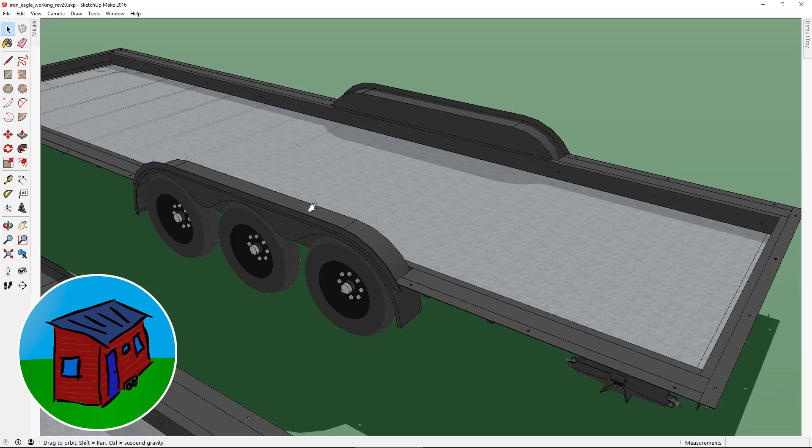Hey guys, this is a demonstration video on how to make best use of the Iron Eagle tiny house trailers that we've produced using SketchUp. We worked directly with Iron Eagle to make sure that everything is bang on accurate, and we've bundled all 9 of their trailer lengths, ranging from 12 to 28 feet, into a single download

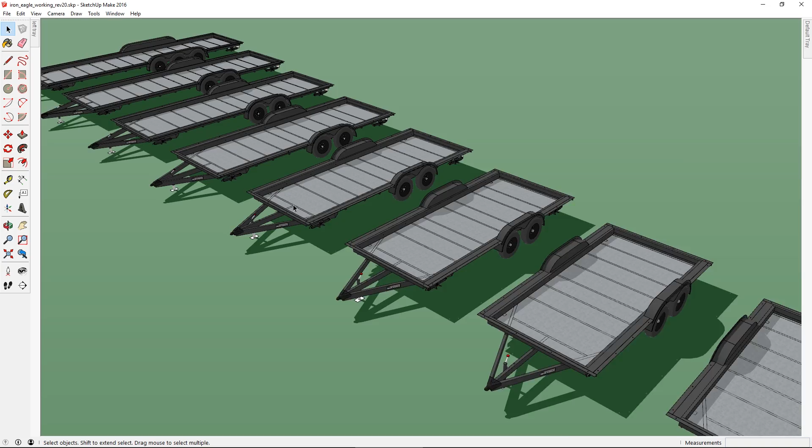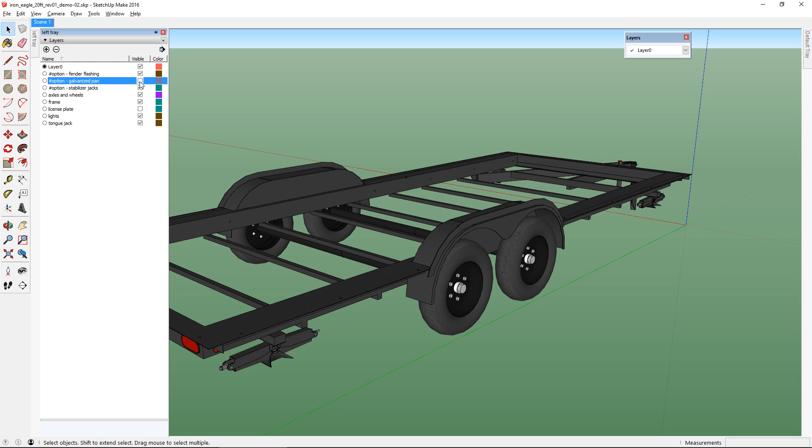So without further ado, let's look at how the sunken floor and flange system is meant to accept a tiny house foundation. First, let's do a quick tour of the model. I'll point out that I've got things organized into layers, which should be pretty obvious the way that they're labeled, including these options. So the options are fender flashing, the galvanized pan, and the stabilizer jacks.

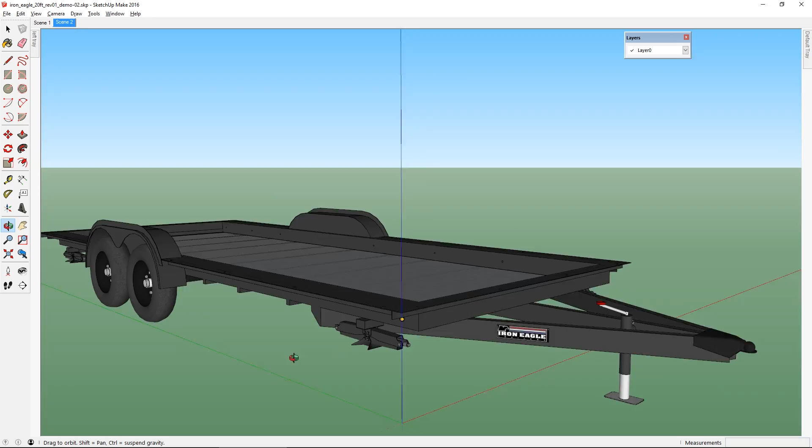Then you can also hide the axles and wheels, the entire frame. There's also a license plate just to demonstrate where it will go. You can hide all the lights and the tongue jack. One of the big things about the Iron Eagle design is the sunken floor cavity, which means there'll be no metal directly underneath the tiny house floor.

We've already made real-life videos going over all the features of the design in detail, as well as a demonstration of the construction of a floor inside an Iron Eagle trailer. So I won't go over all that again. I'll focus more on the actual 3D modeling here.

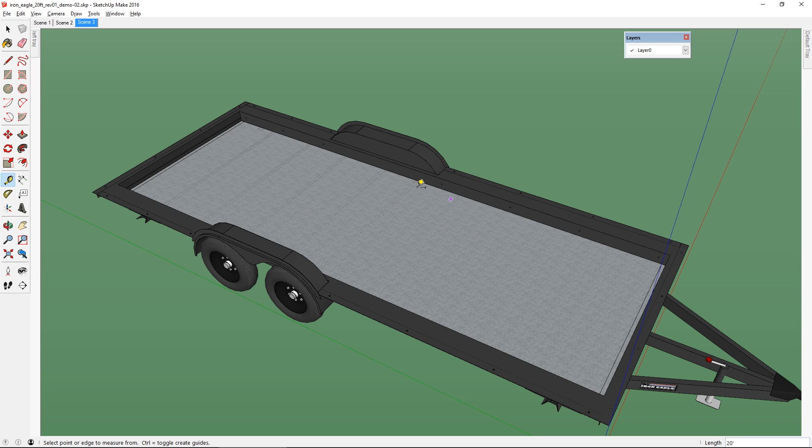So since this is a 20-foot trailer, and that measurement is from the edges of the flanges, we can do a 12-foot piece of lumber, and then what will be slightly less than 8 feet, because we're working inside the floor cavity, to do our rim joists. So I'll start down here and make my first piece of lumber.

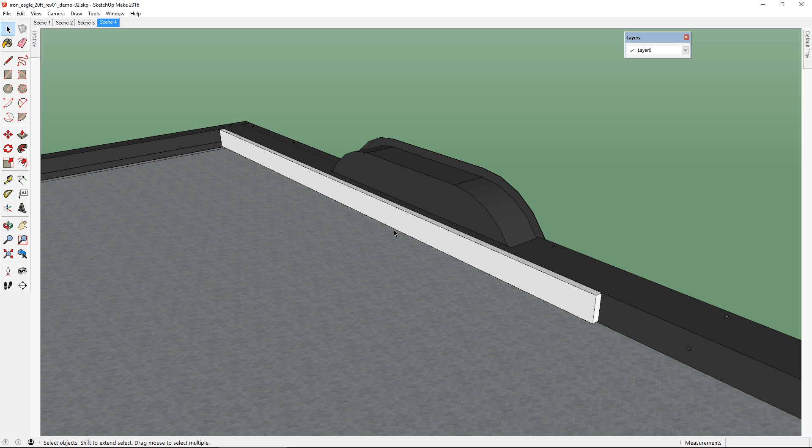So I'm going to use the rectangle tool, start drawing here, and let's go 1.5, comma 5.5, and then I'll use the push-pull, pull that out, and let's make that 12 feet. So this will be a 2x6, 12 foot long. I'm going to make that into a group, and I'm also going to give it a wood texture. Let's use this one. There we go.

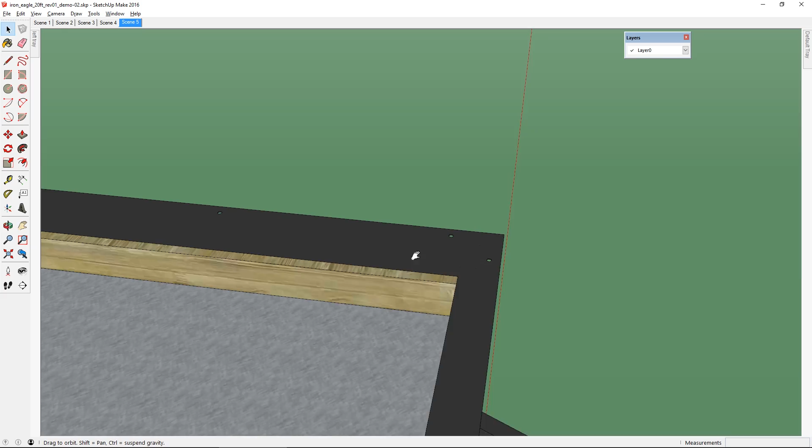Now I'll just select it and copy move it down to the end here to make a second piece, and then use the push-pull tool to snap this into here. Now you'll notice that the trailer framing has holes pre-punched in the side, and those are meant to accept hardware that will support those rim joists. So I'll just quickly make some bolts here so that we can visually see how that will work.

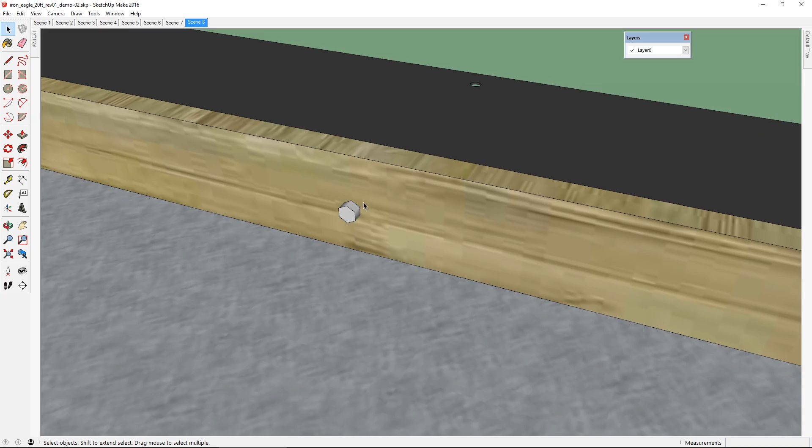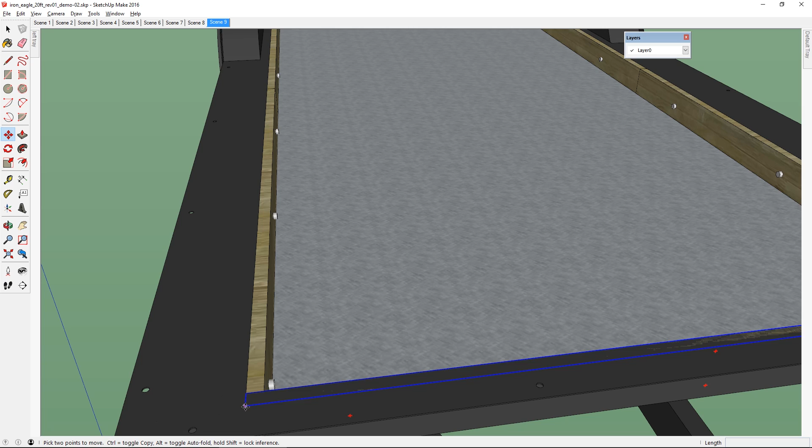Alright, obviously this is a very simple representation of that hardware. You probably want washers or maybe even use carriage bolts or something, but at least we can see where they are. And now we can just copy this over to the other side. Now we'll want the regular joist, so I'll just make a copy of one of these guys, swing it out, move it into place, and adjust the length.

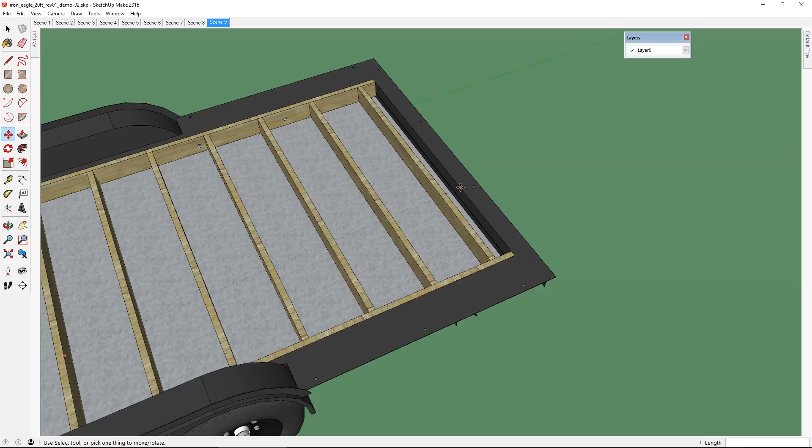And let's say we want 16 inch on center, so I'll move a copy out 16 inches times, let's go with 12, 13, 14, it's pretty close. So this way we can see if any of them interfere with the hardware, which I don't think they do, but that could be adjusted. So let's just get this last one. Let's make this last space a little bit bigger, something like that.

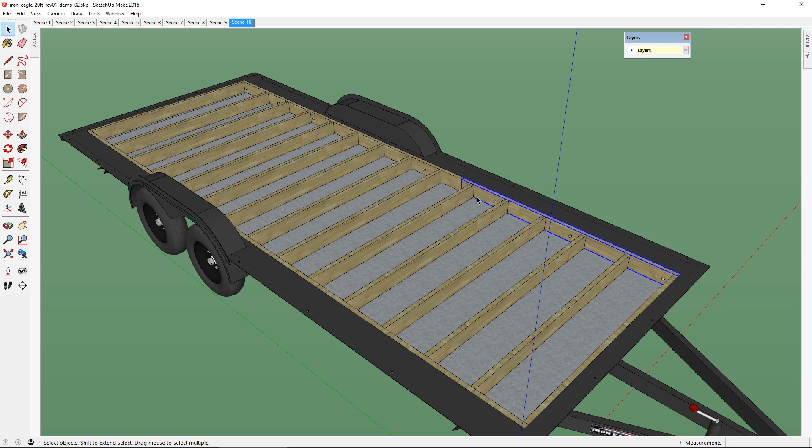So these joists would have to be supported by joist hangers connected to the rim joists. So let's see if we can just pop some in there. Go to the 3D Warehouse, I'll search 2x6 hanger, and pick this one. Let's bring this in, and I'll see if I can pop these in quickly.

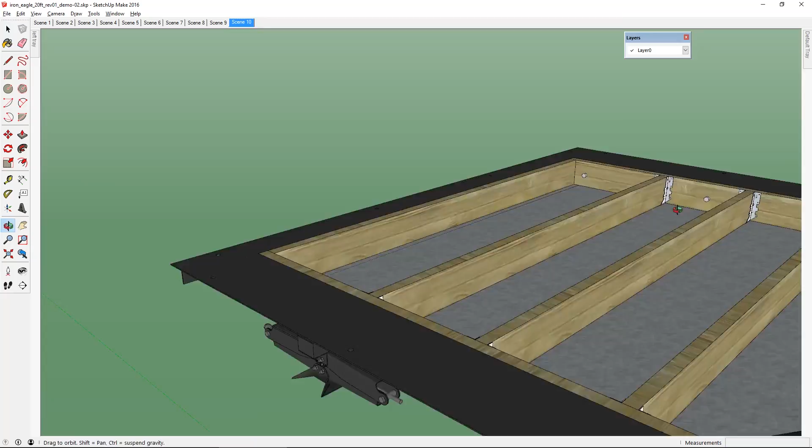So now we can see roughly how the hangers will sit, and we can see that this type of hanger would not fit on the end joists. So maybe a different type of hanger needs to be used. Or maybe we just need to move the joists out a bit so that this type of hanger can be made to fit. And maybe this will affect the order in which we assemble things.

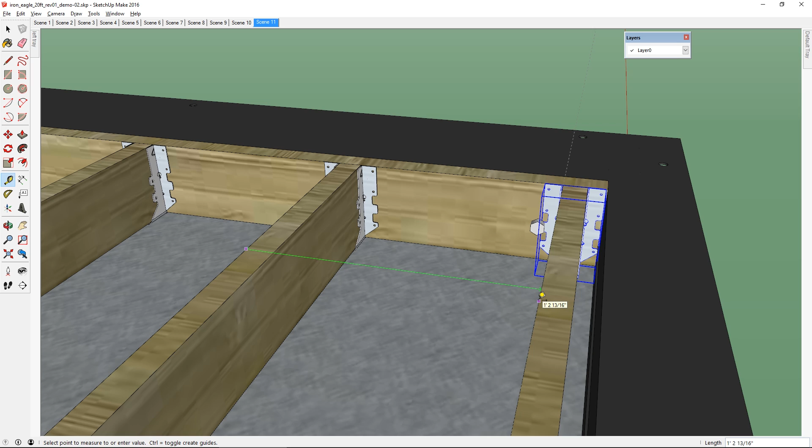And what about the space between these two joists now? It's no longer 16 on center, so maybe we need to bump all the joists down to account for that. Identifying and solving little issues like this is exactly what makes modeling in high precision great. Every little detail can be worked out before ever picking up a tool.

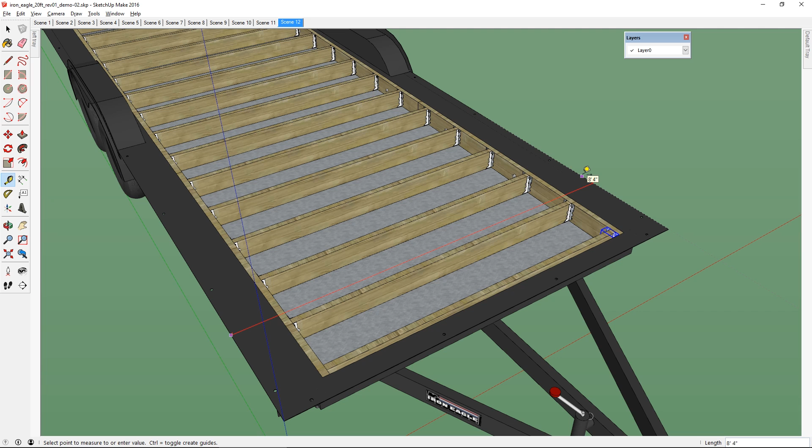Another thing that could affect the layout of the floor joists is the subfloor sheathing. Now, it would be nice to just put a bunch of full sheets down, 8 foot by 4 foot, but the 100-inch width of the trailer is 8 foot 4, so one sheet won't quite span all the way across. You'll notice if you watched our building series that we actually staggered some sheets, but a better way to do it is to put the bottom plate for the wall framing down first, and then put the sheathing in between. So let's do that.

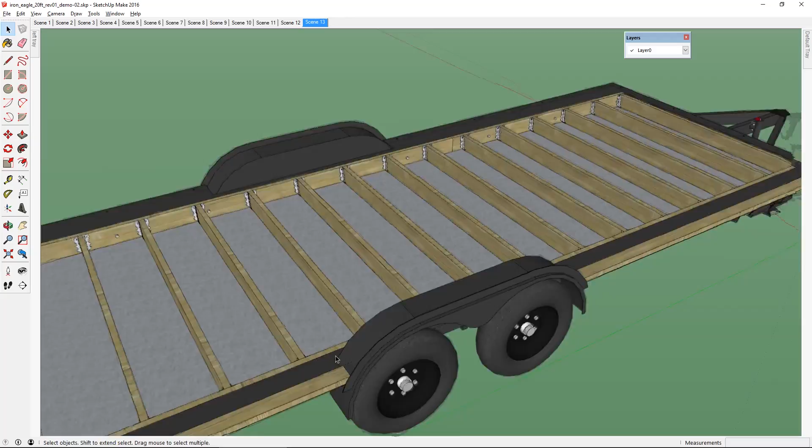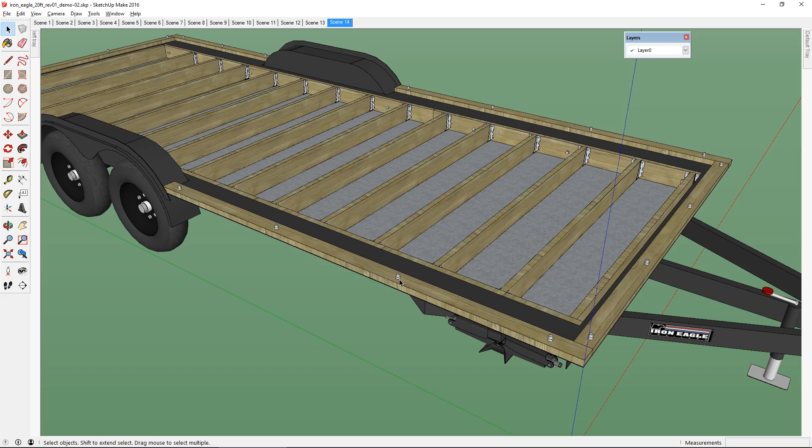Alright, there's a bottom plate in, and again I took the time to put in the bolts just for visual cue. But we actually used threaded rod and ran it all the way up and bolted it down on the top of the top plate. So there's definitely different methods that can be used, but it's just a way of highlighting the fact that there are also pre-drilled holes for whatever method you see fit to secure basically the wall framing to the trailer.

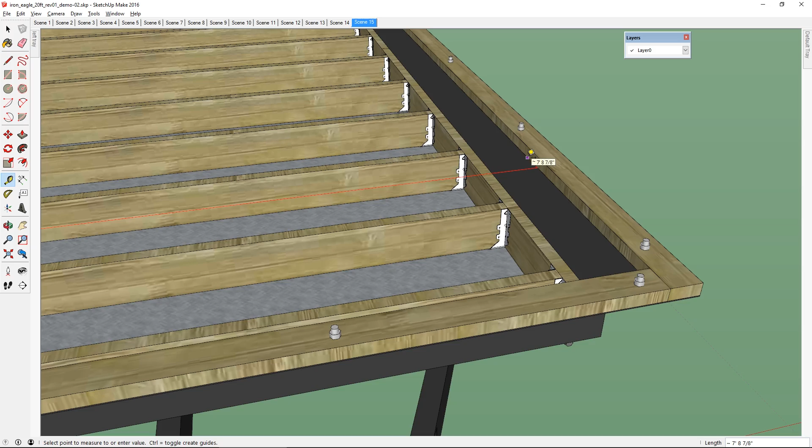So now that we've placed two 3.5-inch bottom plates, the distance between the two bottom plates is less than 8 feet. So a single sheet of plywood trimmed down a bit will span the whole gap. So we'll want to go 4 foot in from this edge for the other dimension. So I'll put a guide at 4 feet, and that'll be out there. So we can see that to get a joist directly under that joint, we'll need to adjust the joist.

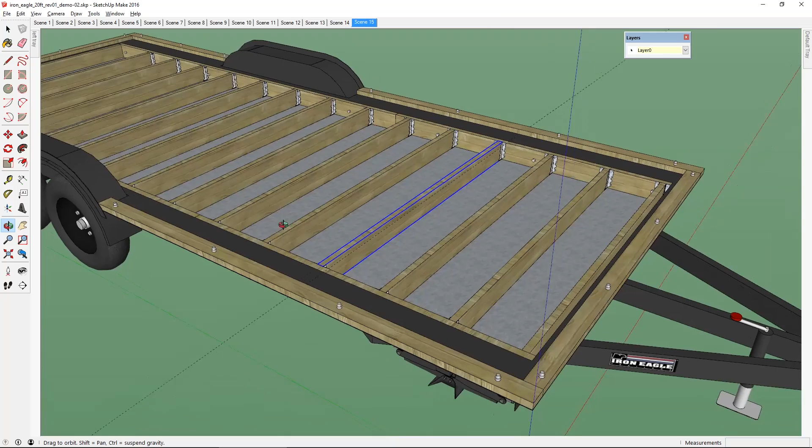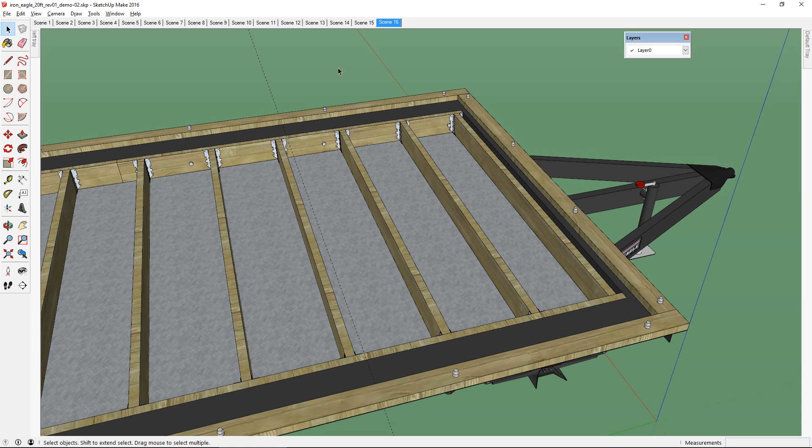So before I start covering things up, I'm going to make a layer specifically for the floor framing, and then I'll make a new layer for the sheathing so that I can toggle between the two and edit them separately. For the sake of simplicity, I've put all of the wood I've made so far into one layer called floor framing, but as the model grows in complexity, I would probably want wall framing, maybe even back wall, side wall, and so on.

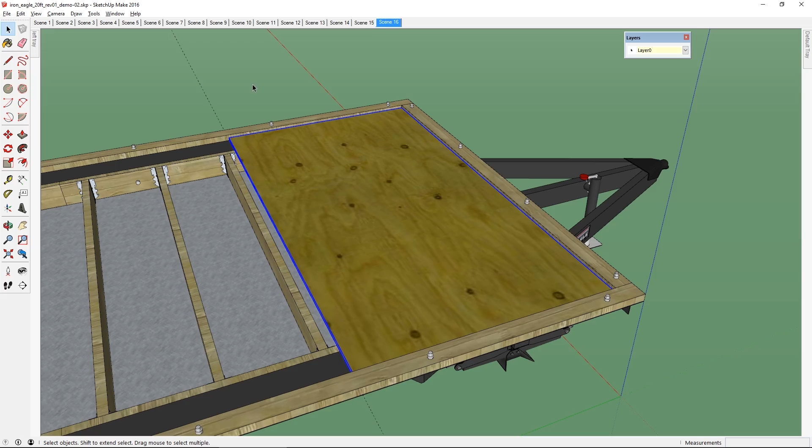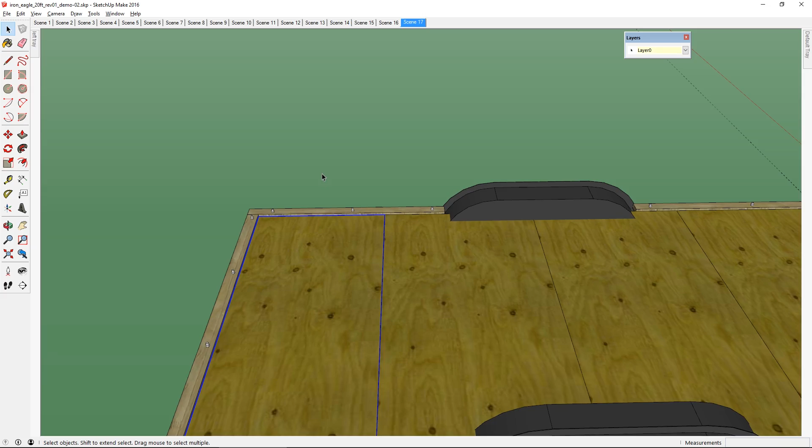But now I'm ready to work on the subfloor, so I'm going to use the rectangle tool and just draw in between from the inner edge of that framing over to here, and then let's say it's 3/4 inch, so I'll pull that up 3/4. Make it a group, go to materials, wood, plywood, and paint it on there. Now I'm going to copy as many sheets as I will need to cover the whole floor. So we can see that there is a little bit extra, so I'll just resize this one. Obviously there's also a bit of interference with the fenders, so I can just carve that out of these sheets.

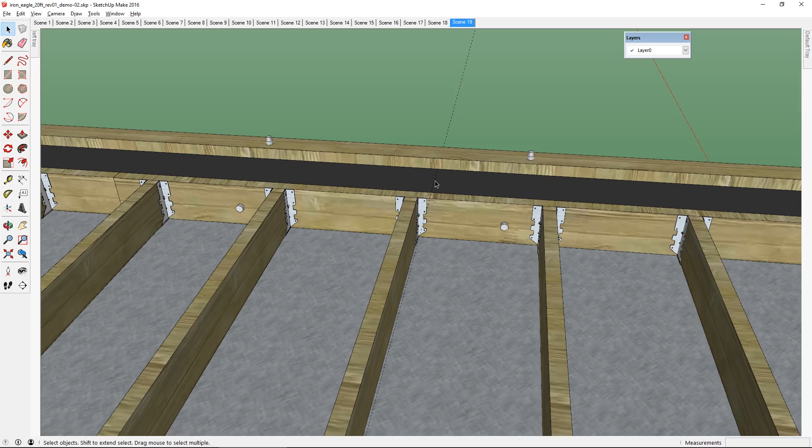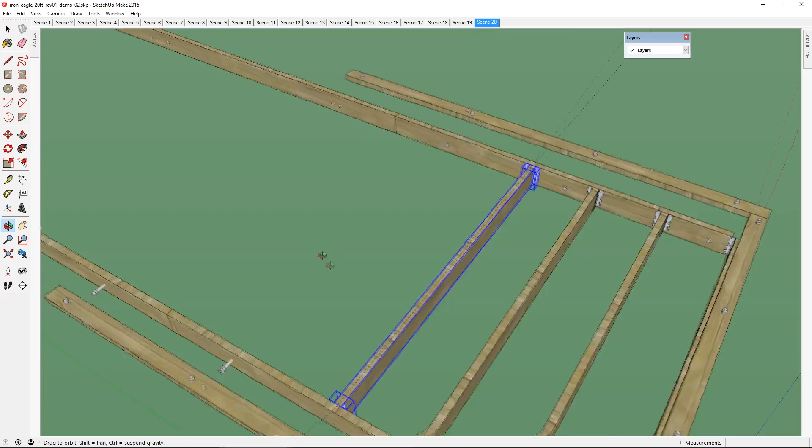Now I'm going to grab all these sheets, put them on the subfloor layer, and then toggle them off. And since I've still got the guide that I originally used to make the first sheet, I know that that's where the first seam is going to land, and I can use that as a reference to adjust my framing so that there will be a joist under every seam. Alright, there we go. So I basically just deleted everything so that I could reduplicate from my nice point of origin at 16 on center.

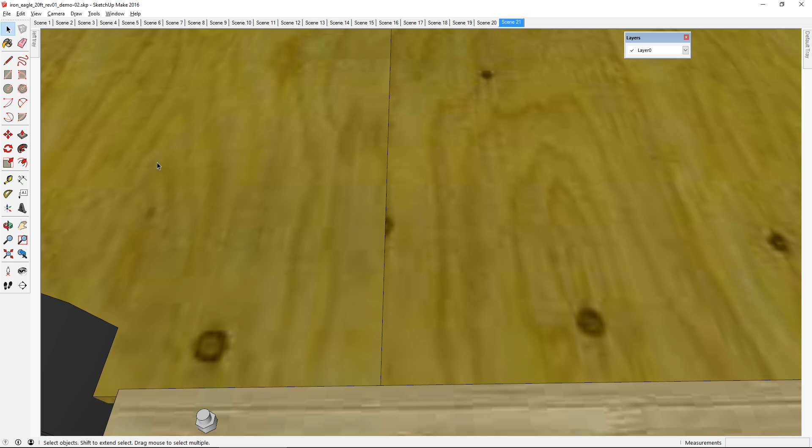And if we toggle the subfloor back on, so let's look over this seam. If we toggle it off, you can see that there is a joist under there. And let's skip one, go down to here. There we go. So directly over top of this joist is the seam. So there we go. Now there's one other thing I want to go over.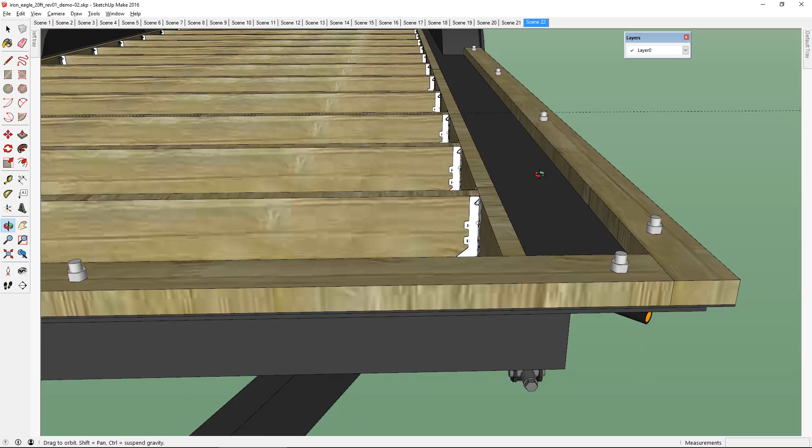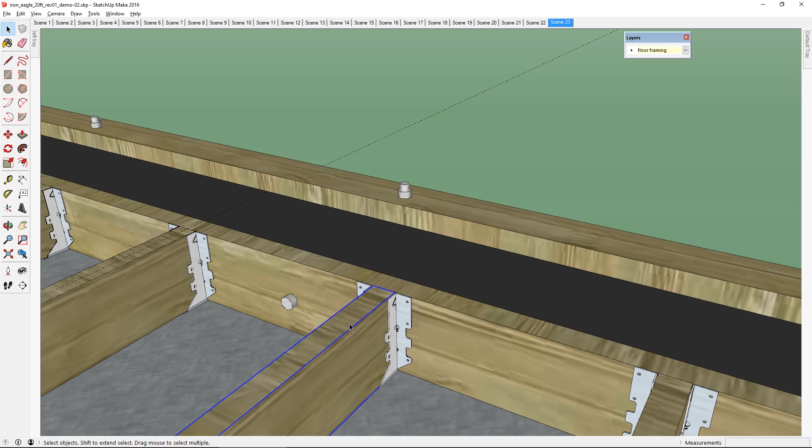You've probably noticed that part of the subfloor sheets are sitting directly on top of the metal side extensions of the trailer, and that the top of the floor framing is level with that deck height. So in a particularly cold climate where all thermal bridging should be eliminated, we could simply use thicker framing here and raise the floor above this level. We're using 2x6s, but I'm going to scale these up to the size of 2x8s to demonstrate.

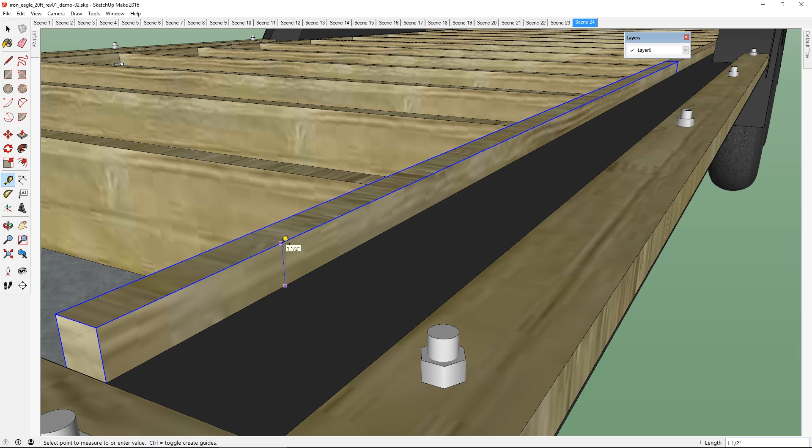So now we've got 2x8 framing, which is 1 3/4 inches taller. So I've bumped it down 1/4 inch, which there's space to do because the sunken space is 6 inches deep. And the result is that the top surface of the framing is now 1.5 inches above the deck. This means that we could put some 2x2s to essentially support the sheathing and still allow for lots of insulation to be snuck in around the perimeter to isolate the subfloor from the metal of the trailer.

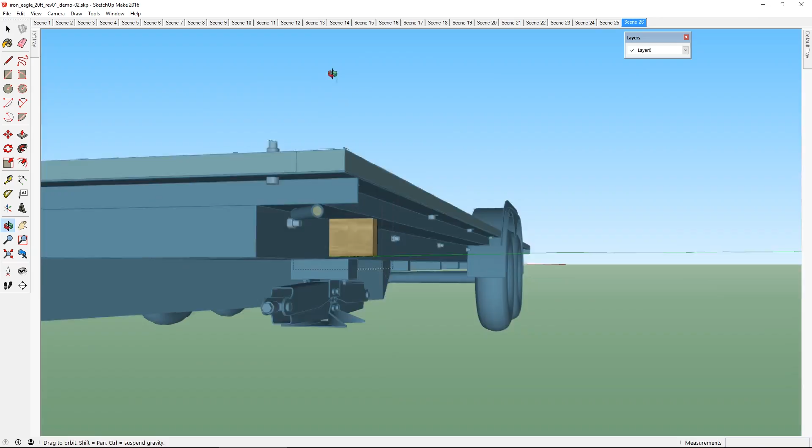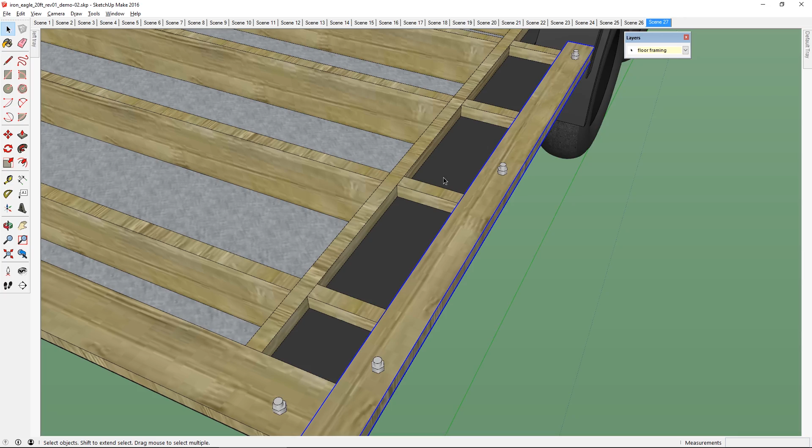And to get support on the ends, we could simply shorten this rim joist by 1/2 inch and then turn this bottom plate into a 2x6. And in fact, we probably should do that around the whole perimeter so that this edge has full support as well. Now I haven't touched the subfloor layer, so it's still sitting down at the original height. So I'm going to bring that up and then I'll add a bit of transparency to it so that we can look and see exactly what's happening underneath.

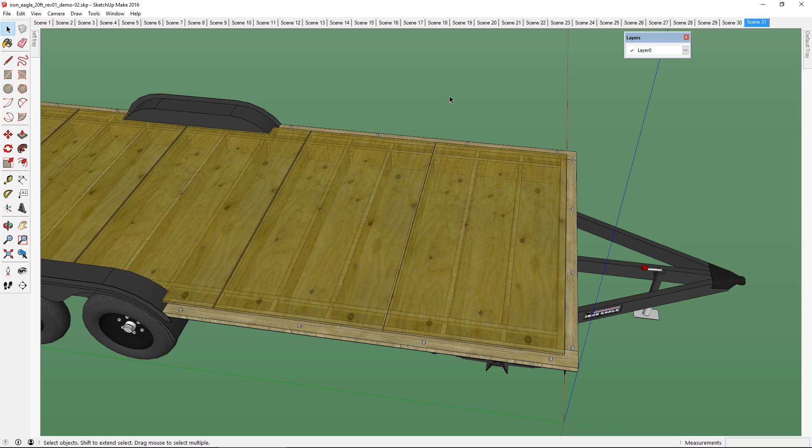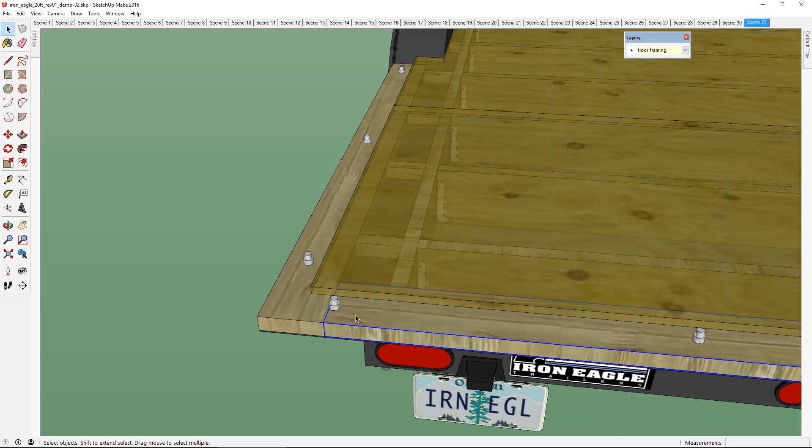So now we can see that the subfloor is supported everywhere that it needs to be. There's no sort of flapping edge that's unsupported. Every seam is over a joist, and it's lifted up off of the trailer so that insulation can be tucked under there. And of course, some wood will always have to be in contact with metal when building a tiny house. But there's methods that can be used to mitigate that, such as sill sealer or sill gasket as we call it, to give a bit of a thermal break between the two materials.

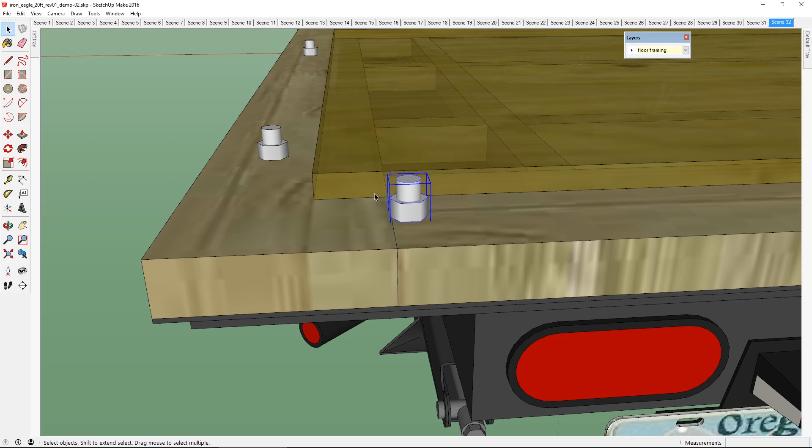From here forward, I would recommend going over the model, touching up things, organizing things into layers, and just making sure everything is bang on precise. I noticed that little things like my bolts got off from some of the resizing and things that I've done, so it's always good after doing any adjustments to make sure that it hasn't affected anything else.

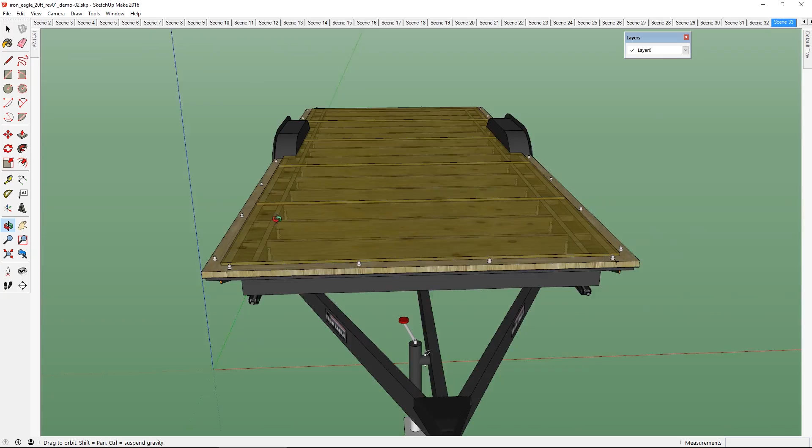I should of course mention that I'm not a professional builder and that you may notice flaws or room for improvement in the technique that I've shown here, and absolutely do whatever you think is best, but this is a demonstration on how to basically use this 3D resource to figure all that out and decide how you want to go about it.